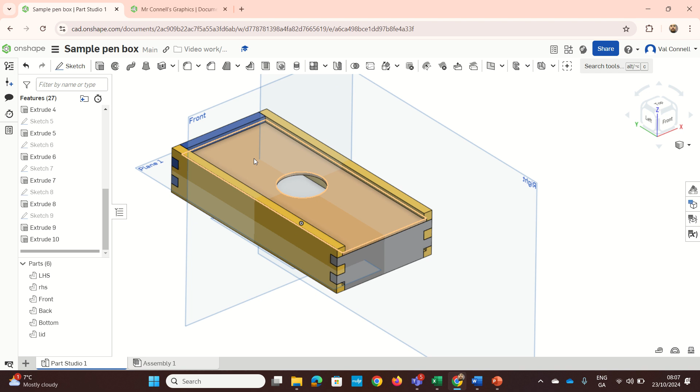So, welcome to this Onshape video where I'm going to teach you how to make a pen box or pencil box, similar to this one here. In this tutorial, we're going to learn commands such as our extrude, our mirror, parts and features. We're also going to use the mirror sketch tool that's here. And we will learn how to add some appearances as well.

So we're going to go to create. And we're going to type in our document name. Now, so here we are. We're going to press sketch. We're going to select the top plane. So left click on top plane.

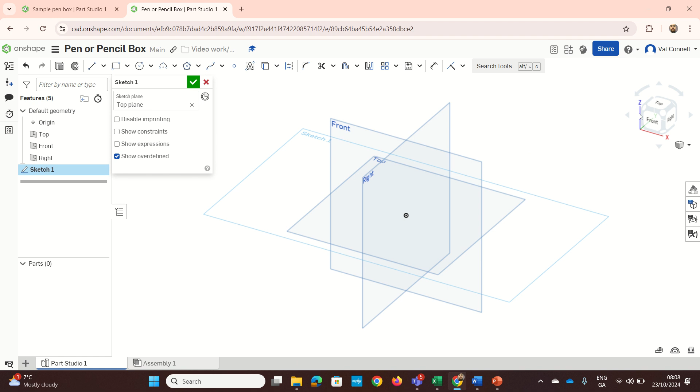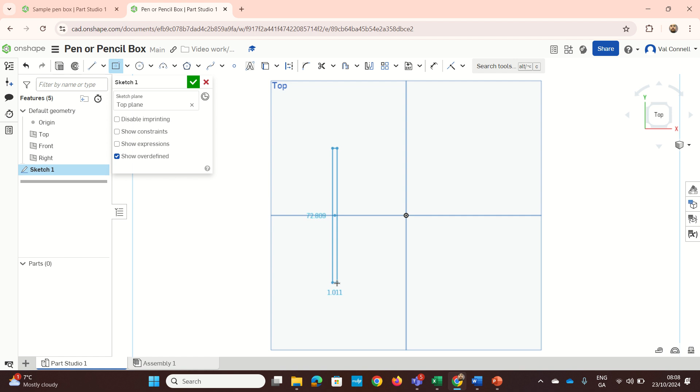We're going to move our mouse to the top on the cube and we're going to click that. And we're going to press R for center rectangle. Now I'm going to highlight the origin. It goes orange. I'm going to move my mouse along the cross, which is an edge view of the front plane, to left click here. I'm going to move my mouse out and down.

So D for dimension. And I'm going to click this long edge here. I'm going to type in 300 mm. And then I'm going to click this one here. And I'm going to type in 12 mm.

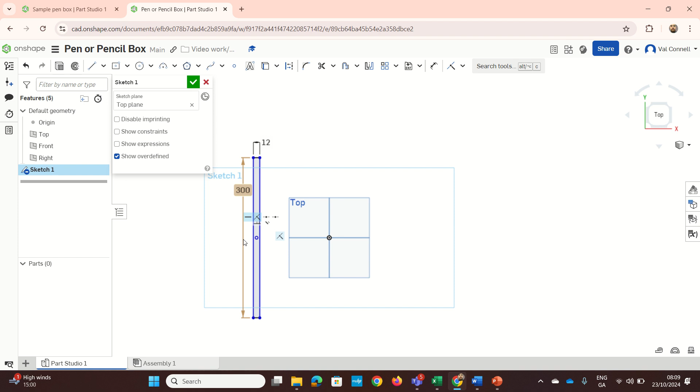Now I'm going to click this point here and click that one edge of the plane there and press I to make sure they're coincident. Then I'm going to go D for dimension, left click this edge here, and left click the edge of the right plane. I'm going to left click the number here. I'm going to type in 50.

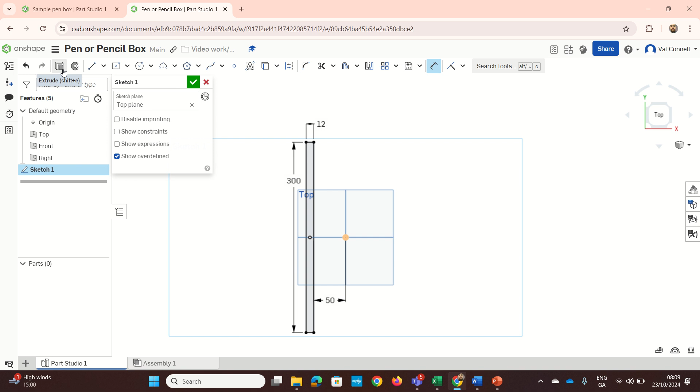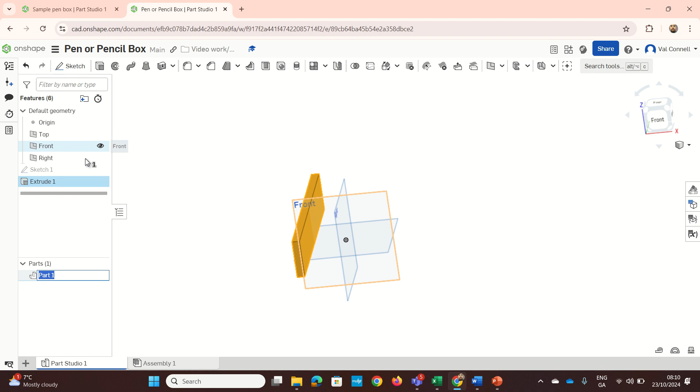Now I'm going to move my mouse up here and I'm going to press extrude. So I'm going to press extrude and I'm going to type in 60 and press enter. And I'm going to go down to parts here. And I'm going to right click over part 1 and rename it LHS, left hand side.

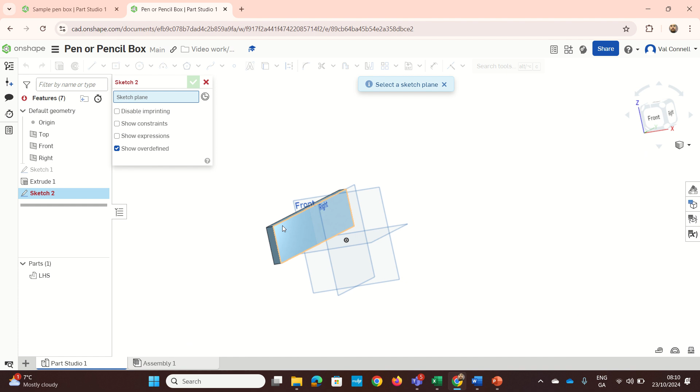Now I'm going to cut out the finger joints on this left hand side. So I'm going to press sketch. I'm going to select the inner face here. I'm going to move my mouse over to right and select the right plane. Now I'm going to go this time and press the drop down arrow here and select corner rectangle, or G for corner rectangle.

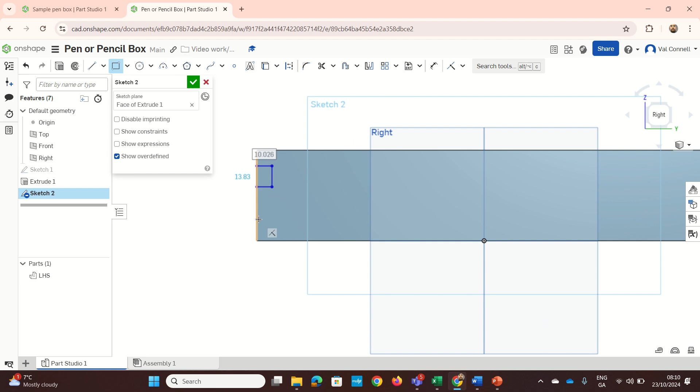Now I'm going to draw one rectangle, and left click here, second rectangle. I'm going to keep them in line. Now I'll turn off the rectangle tool by unticking it or pressing the letter G. I'm going to press D for dimension or select the command there.

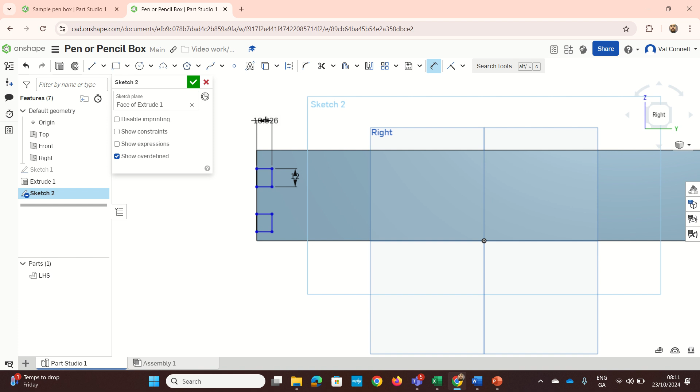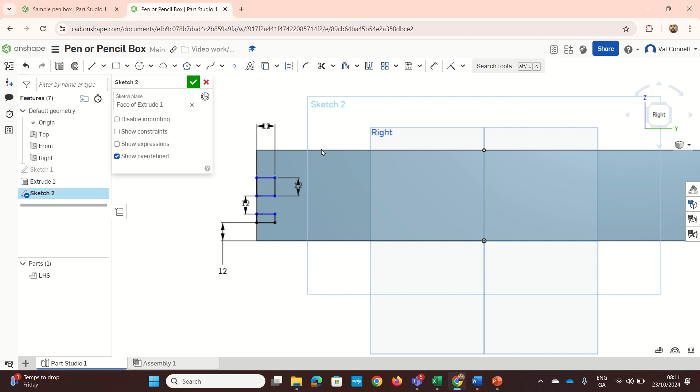Now, I'm going to make this 12. I'm going to left click that as 12. Left click this, then 12. I'm going to left click this line here on the bottom, move it out, take 12. Space here, I'm going to make 12. Now I'm going to turn off D for dimension. So press D to turn off the dimension tool.

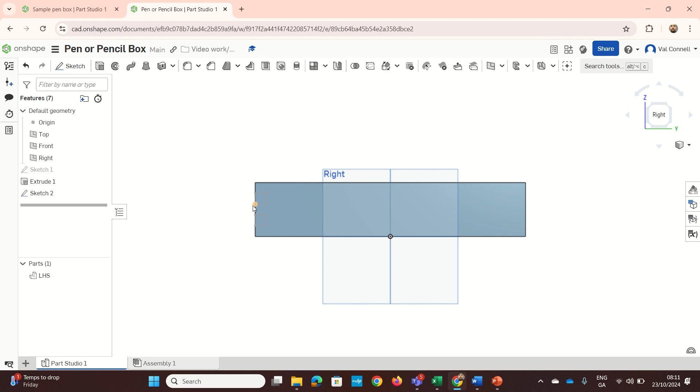I'm going to left click this line and this line and press E for equals. Now we can see there we've got the rectangles in. I'm going to press Shift and the letter E. Then we're going to open up the extrude command. I'm going to move this to remove. I'm going to hit the drop down arrow and change blind to through all. And then I'm going to tick OK.

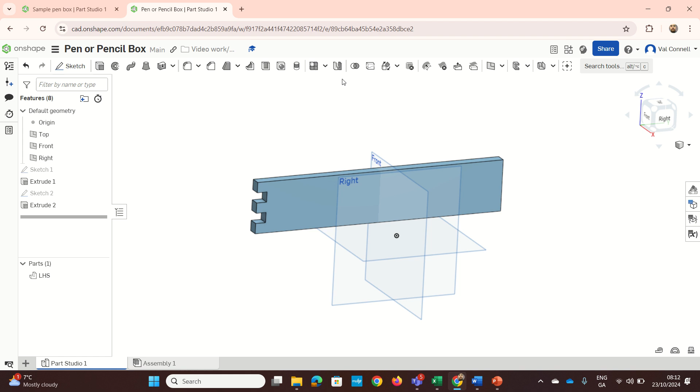So there we have the fingers on one end. Now I want to get them on the opposite end. So I'm going to go to this tool called mirror here. I'm going to left click that. Now I'm changing from part mirror to a feature mirror. Okay. And I'm going to select mirror plane, feature mirror.

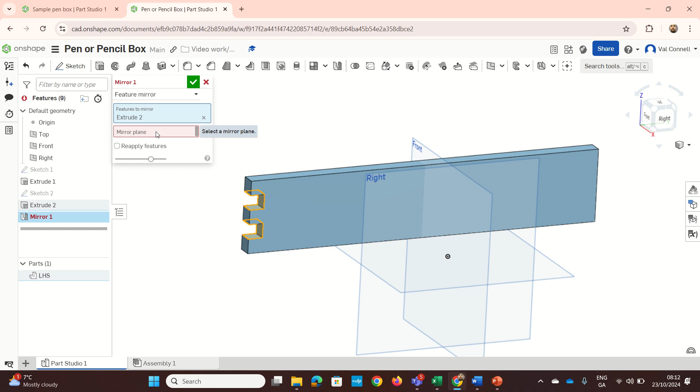So I'm going to left click in there. I'm going to left click the extrude. Now I'm going to left click on mirror plane, select the front plane. And I'm going to tick reapply features. Now, if you didn't put this center rectangle in the middle, on the edge of the front plane here, you're going to have difficulty doing this. Then I'm going to click OK.

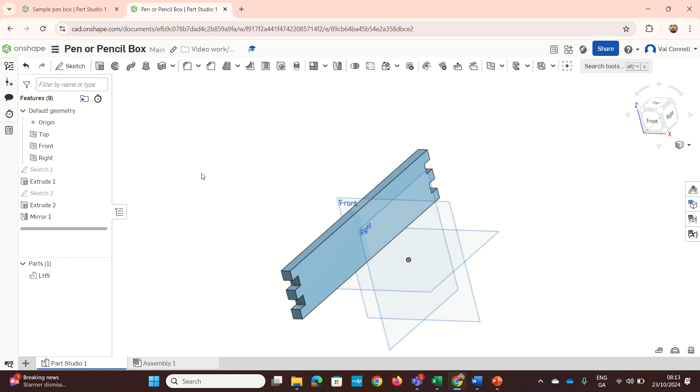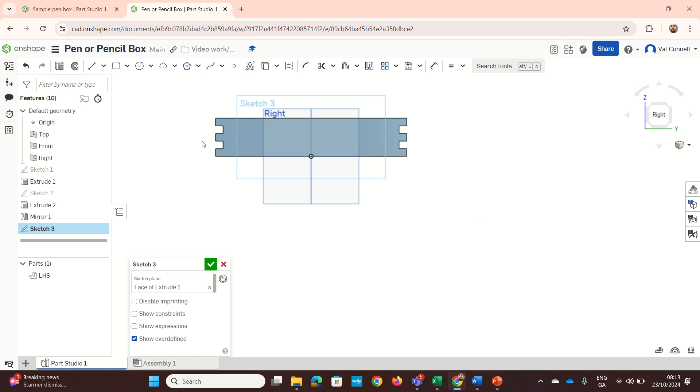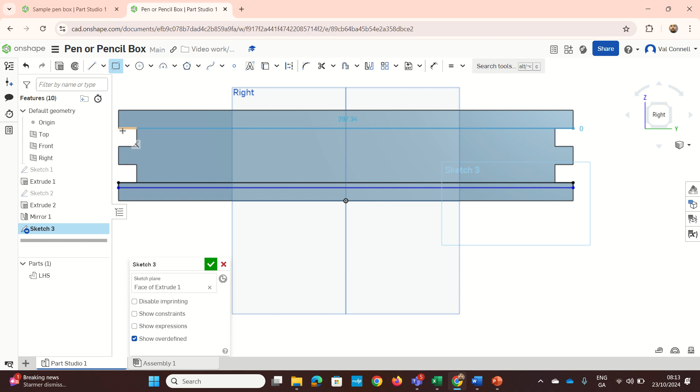Now, we're going to put the groove in for the lid. Now I'm going to select right here. I'm going to go to sketch, select this face here, and I'm going to type in G, corner rectangle. So I'm going to left click this corner here. I'm going to move my mouse all the way over to here, left click there. Then I'm going to go up to the top here, left click here. I'm going to move my mouse all the way over to the left and left click there.

I'm going to press D for dimension. And I'm going to hit the edge, I'm going to type in 4. And then I can turn off D for dimension. So press D to turn off dimension then. And I can left click the bottom line and left click this line here and press E for equals. So that means they're the same size.

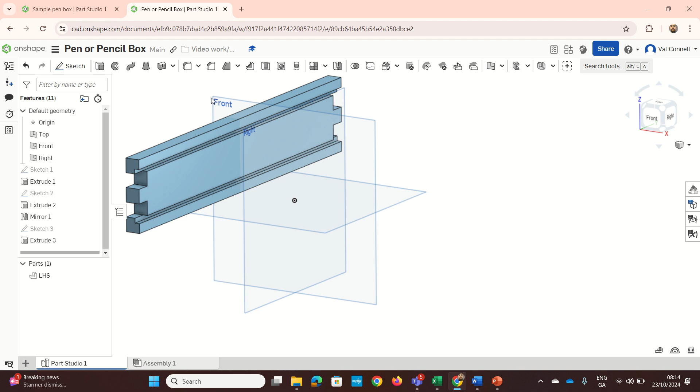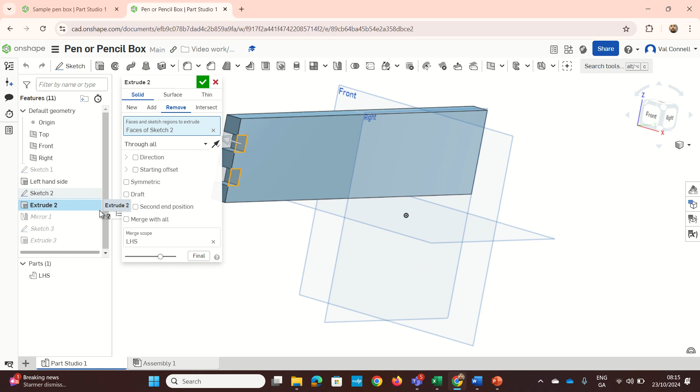I'm going to go Shift and the letter E. I'm going to change this to remove. Keep it blind, and I'm going to change the depth to 4 and press OK. Now we have the groove cut out. Now I'm going to rename this. Alright. Fingers rename. So that was an edit.

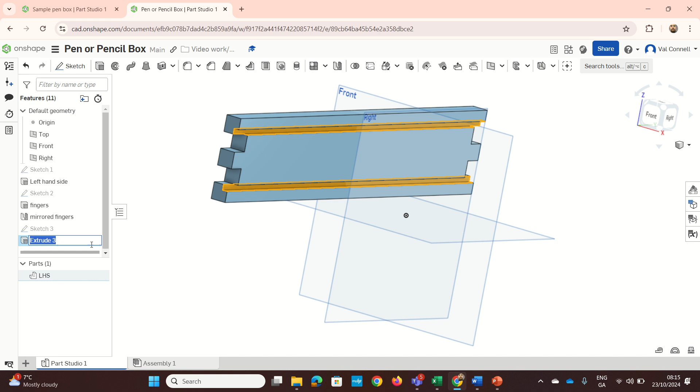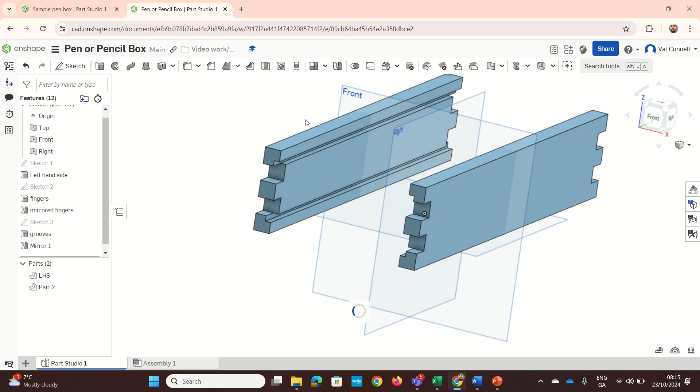Now that's one piece done. So we're now going to get it on the opposite side, on the right hand side. So this is where we're going to learn to do a part mirror. So we're going to go to mirror, part mirror, entities to mirror, this one, mirror plane, right plane, and tick OK. And there we have two pieces there.

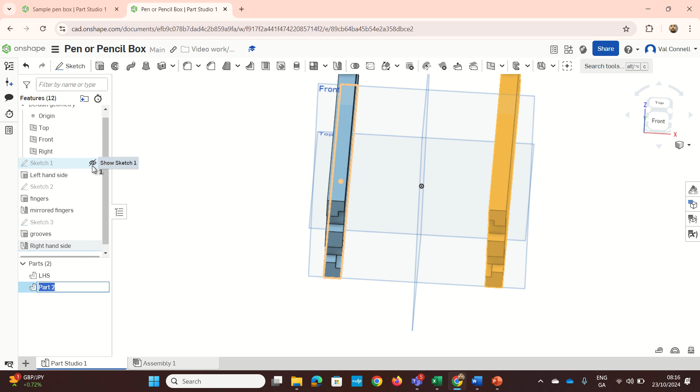Now I can rename, right click on mirror 1, rename. And part 2 I'm going to rename to RHS. Now I'm going to put the back on here. So this back piece I'm going to put on so we can see our finger joints there.

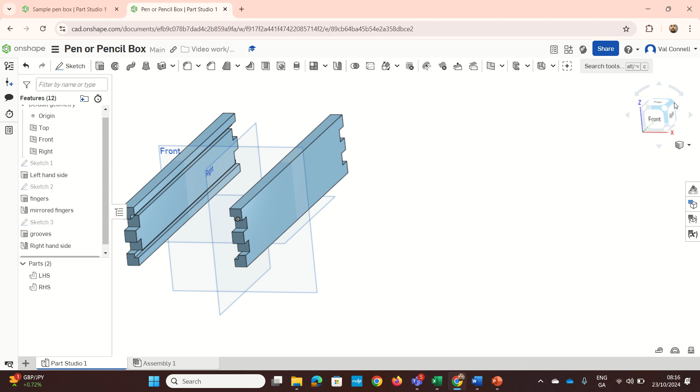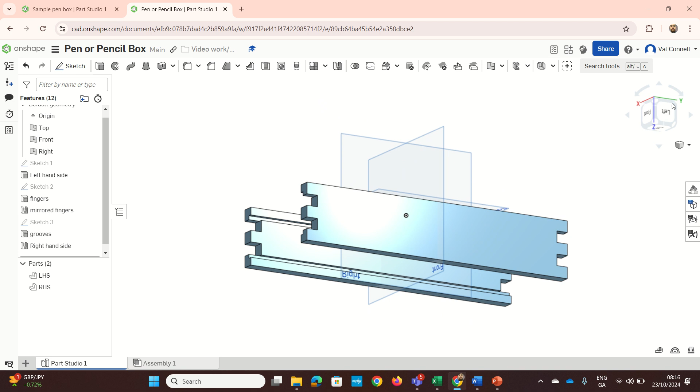Now we're going to move our mouse up to the cube. Okay, I'm going to click the cube there until I get the back selected. Right, so it depends on each student, but you can rotate the cube around like that to be able to find the view that you're looking for if you're struggling on it. There's the back there. Or sorry, that's the bottom, front. There's the back there.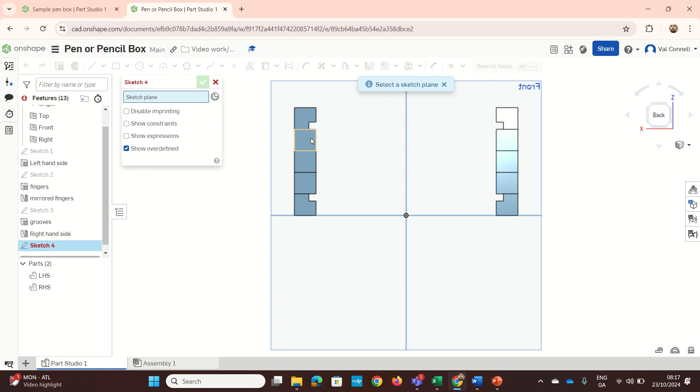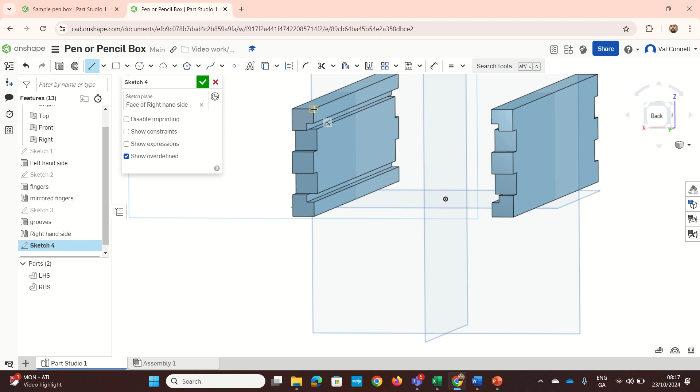Now, I'm going to press sketch. Now, I'm going to select this surface here. So I just rotate a little bit. So this surface here, sorry, this one. I'm going to left click that. Now I'm going to go and hold down the rolly button just a slight bit. L for line, down, okay, across, down, across, down, across, down, across, and down. And then press back there.

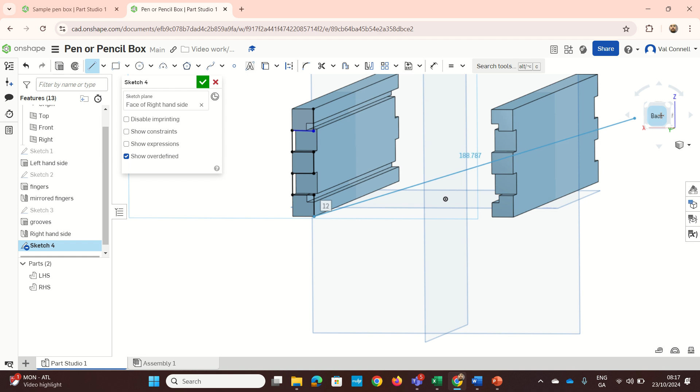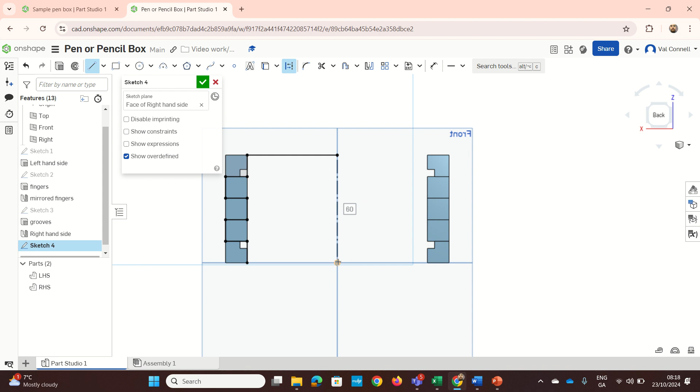Okay, now I'm going to tidy up my sketch. So I'm going to press that line there and press H for horizontal. So we want all the lines to be black. Now I'm going to press L for line again. I want to draw across to here. And I'm going to press Q to turn it into a light line and bring it down to here. And then Q again to turn it back into a heavy line. Now, so we have half of it done there.

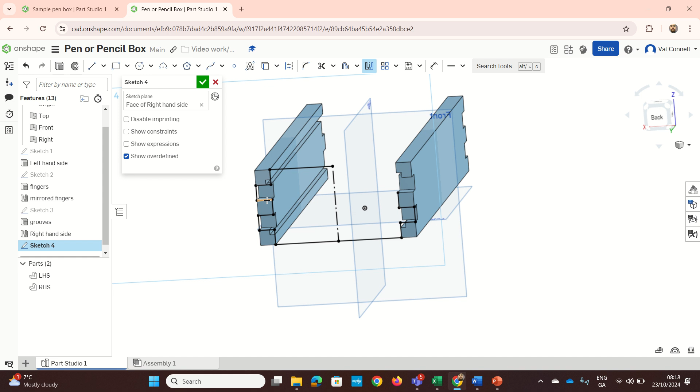I want to go to mirror, select a mirror line. So I'm going to left click the center line. And then I'm going to left click all these ones here. And now it goes grey. Now we're going to press shift and the letter E. I'm going to turn this arrow around. Okay. And I'm just going to drag it back there.

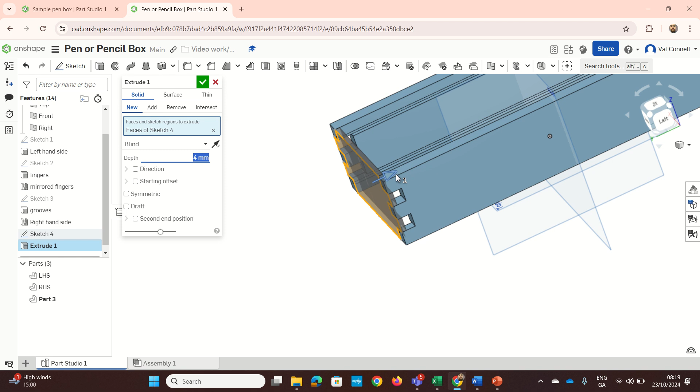And I'm going to press change blind to up to face. And I'm going to select this face here. So just in there, so it finishes at the end of the finger joints. And new has got to be on. I'm going to tick OK. And I'm going to rename this back.

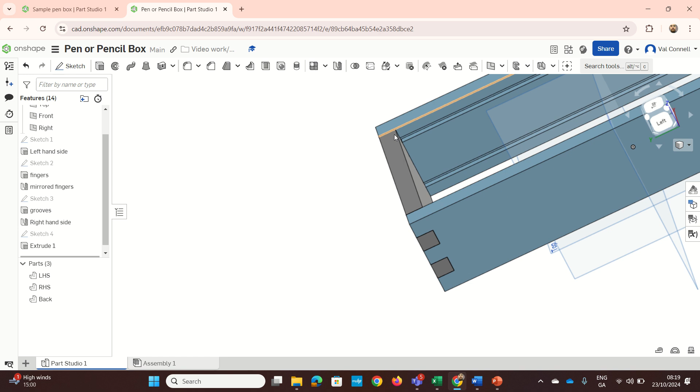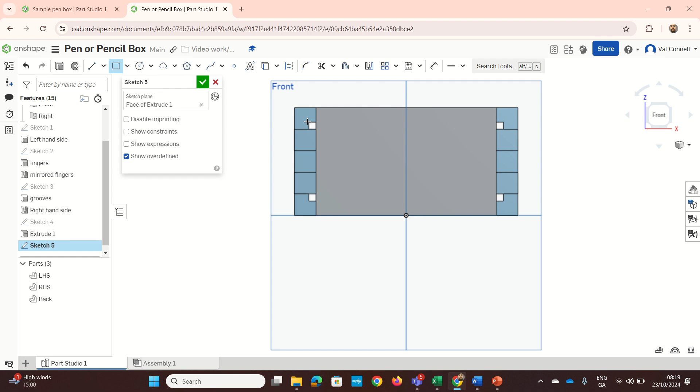Now, I'm going to rotate my model around. I'm going to press sketch and select this face here. And I'm going to hit front. And I'm going to cut out my rectangles. So G for corner rectangle. Left click up here, so just go a little bit over it. And I'm going to move it out here. Now don't snap onto the middle. Okay, so when you see that orange square, don't snap there. Just a little bit further on. So I'll do the same here.

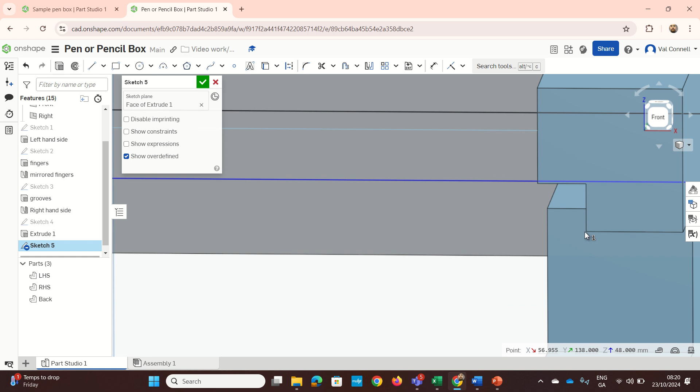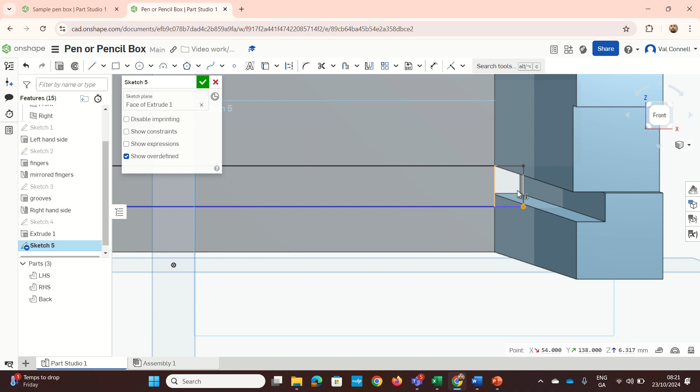Now, press G to turn off the rectangle. Now I'm going to left click this point and left click that one and press the letter I for coincident. To left click that point. Okay, and I'm struggling to get one on the front view. So now when I rotate it a little bit, I can get this one here. So left click that point, press I. I'm going to do the same at the bottom. So I'm going to left click that point there, rotate it a little bit, left click that point and press I.

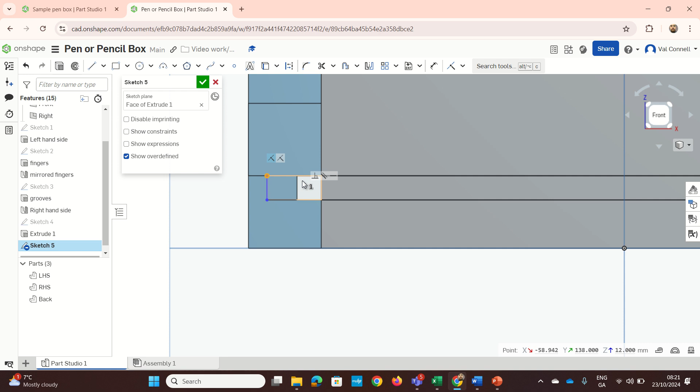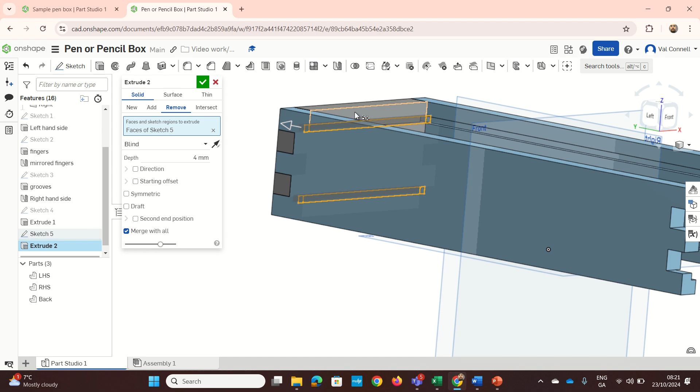Now left click that point. Proving very hard to get, so I'm going to rotate it around a little bit. Left click the point there and press I. Now shift and E. And we're going to go remove. And we're going to type in 4 millimeters. Okay, we're going to select merge scope and select just that part there for a merge scope. Click OK.

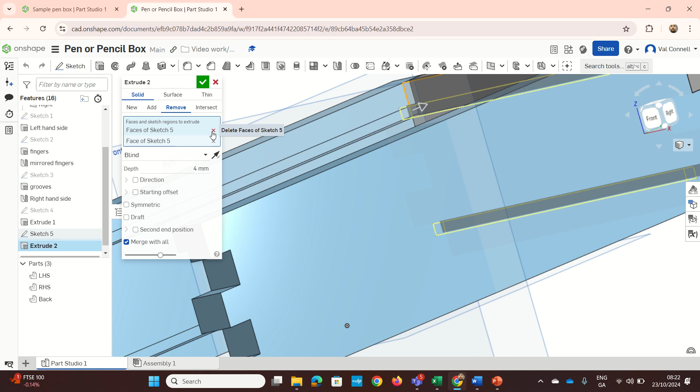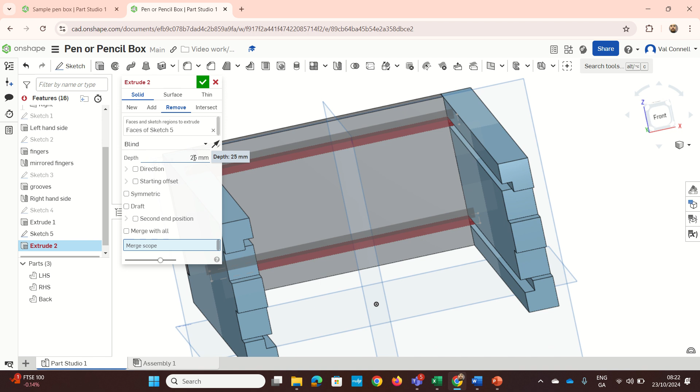Oh, sorry, what's after happening there? I'll have to right click, edit that. Okay. So, oh, I see there, right. So I'll go to clear that. I'll go through it again there, it's handiest. Right click, edit the sketch, extrude, remove, 4. Now merge scope, select the back, tick OK.

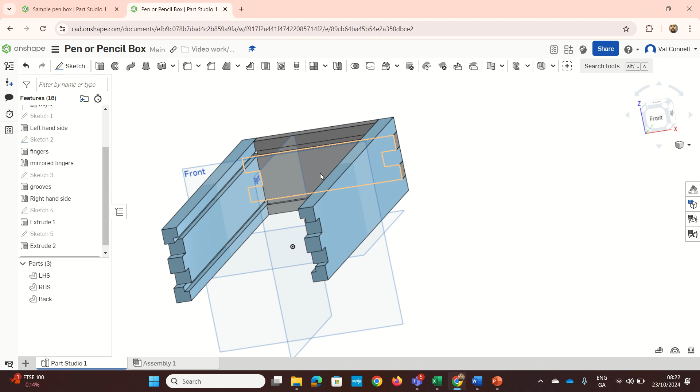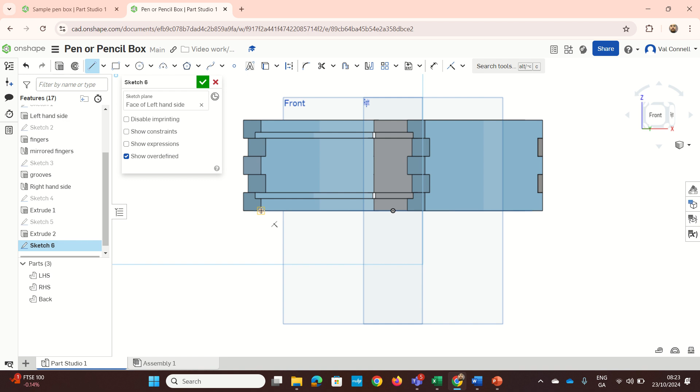Now, there we go. Now I'm going to do the front piece. So I'm going to press sketch, and I'm going to left click that face there. I'm going to press front. I'm going to just press the left arrow key once. L for line. Now I'm going to start here. I'm going to go up, or press the right arrow key. Move my mouse over here to snap so it's horizontal. Across, up, across.

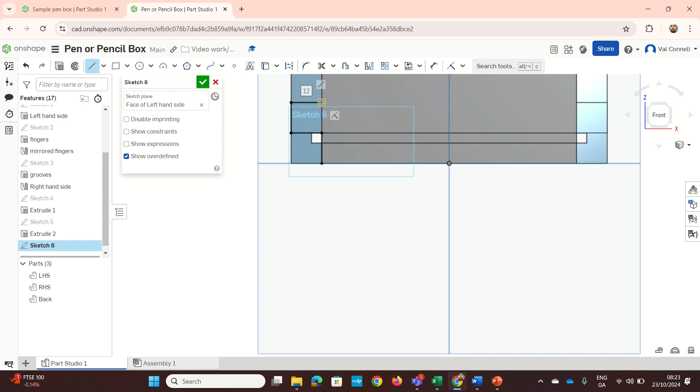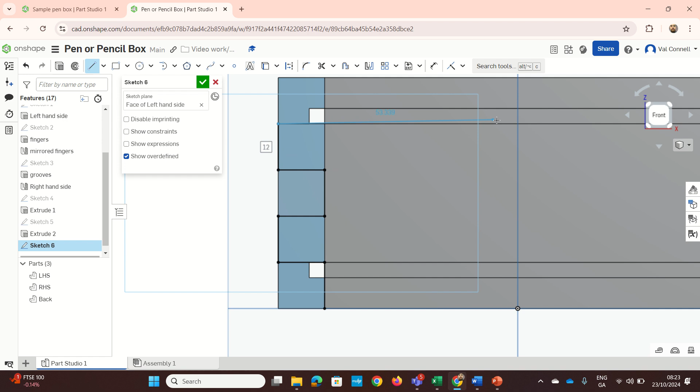So if it goes in arc, press L for line to turn it off, and then press L again to turn it back on. L, up, cross to here. So you can see the shapes we're doing. Now to center, press Q for a light line, back to our front, down to here. Press Q again to turn it to a heavy line. Now we have half of it sketched out there.

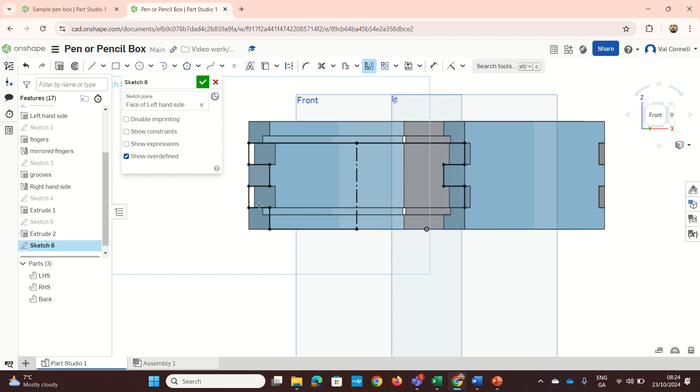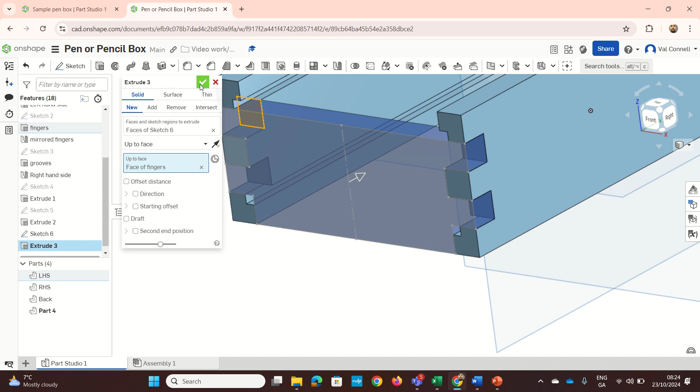Now we're going to press the mirror tool, select a mirror line, this one, and we can left click all these parts that we're flipping around. You see the way it goes grey. I'm going to press Shift, letter E. We're going to change blind to up to face. I'm going to select that face. We're going to click OK. Now, we're going to rename that to front.

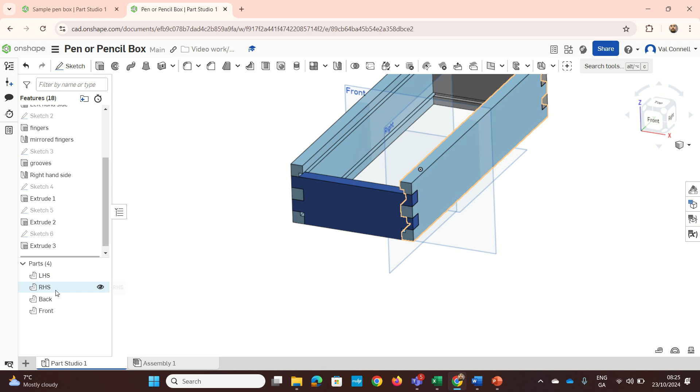And then we're going to cut the groove along the bottom here. So I'm going to go over the back here and press hide the back. Now, okay, I'm going to select the back on the cube here.

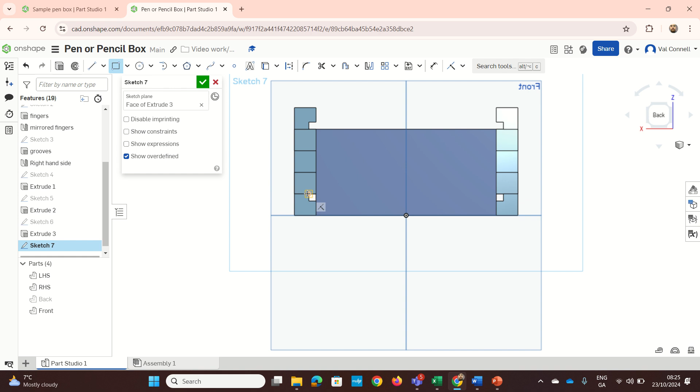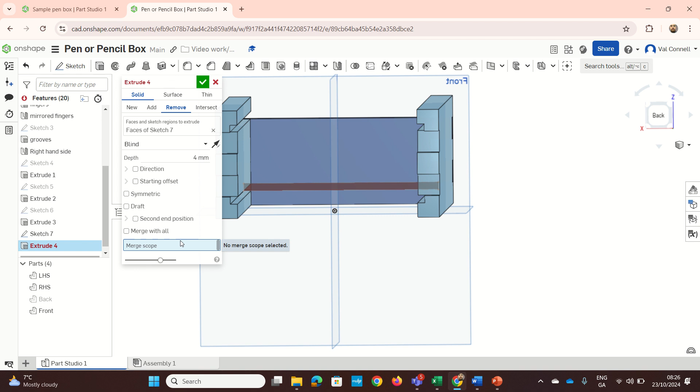I'm going to press sketch, select the face in the front piece, G for corner rectangle, start from the top corner there, move it over here, click it, press G to turn it off, then left click the point, and left click that point there and press the letter I. And then we're going to go Shift and the letter E. We're going to go to remove. We're going to type in 4. And then we're going to left click merge scope and we're going to select the front piece. Click OK.

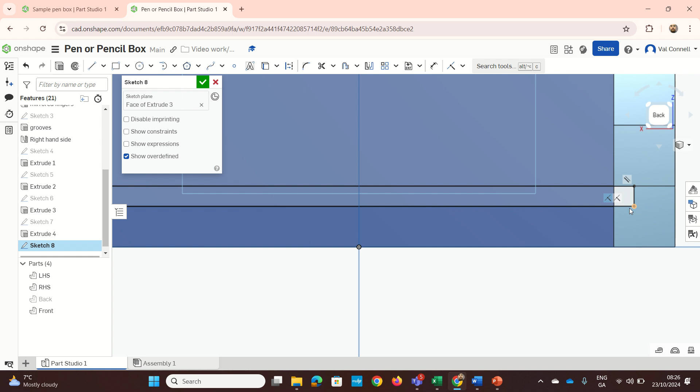Alright, so we're going to put in our base. Now I'm going to press sketch, select the inside of the front face, and press back, so that means you're seeing the reverse. G for corner rectangle. So I'm going to left click at that corner, do my same principle, move it out there, press G to turn it off, left click that point, left click that point, press I, and now we're going to go extrude, and we're going to have new, and we're going to change blind up to face.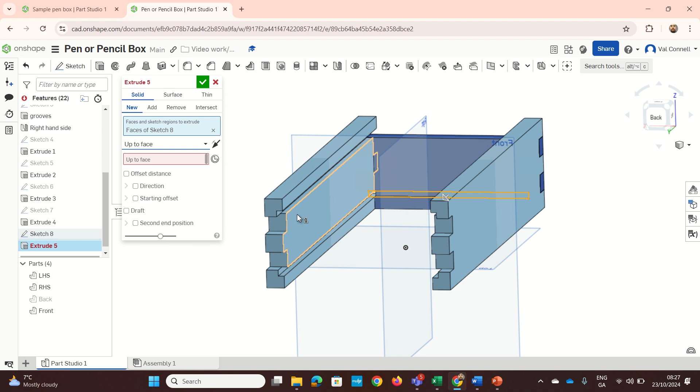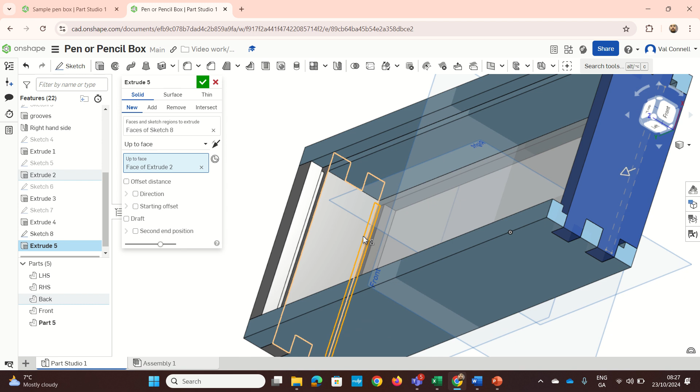Now this is where it'll be tricky. We'll have to go to the back, turn our eye on, we're going to zoom in here. We're going to select that face in there. Okay, I have to left click up to face and tick that there. And then I'm going to tick OK. And I have the base there. So I can rename that the base. And now we have to do the lid.

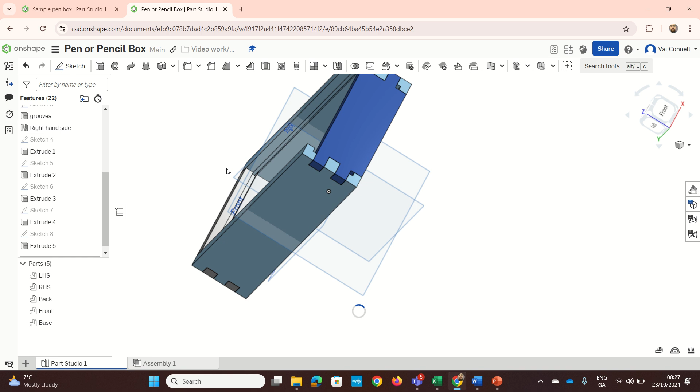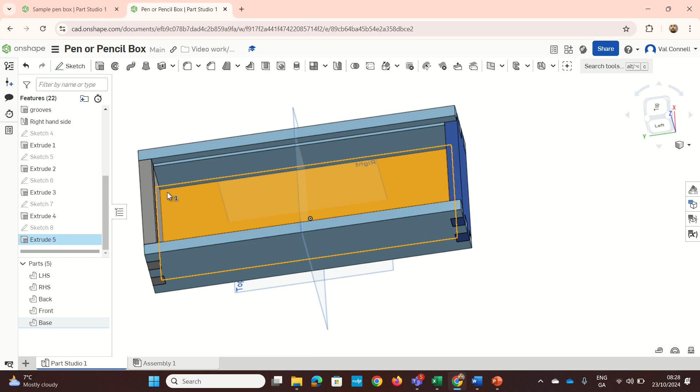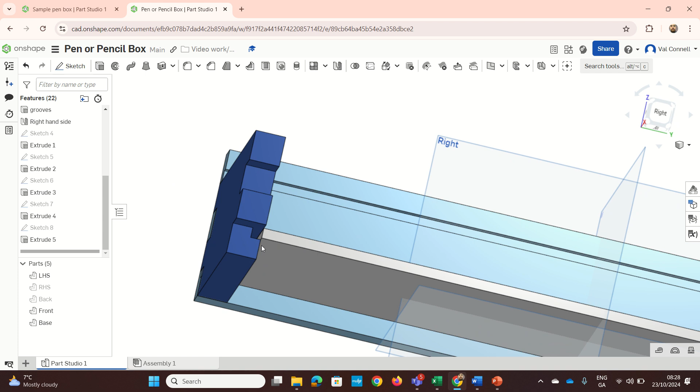Okay, so I'm going to press sketch. Now, just while I think of it, my extrude started. Where did it start from? I'm just going to right click or go over to my back and press hide. And I'm going to go over to my right hand side and press hide. Now zoom in there, and I don't like that there. That doesn't work. So I started on the wrong sketch plane.

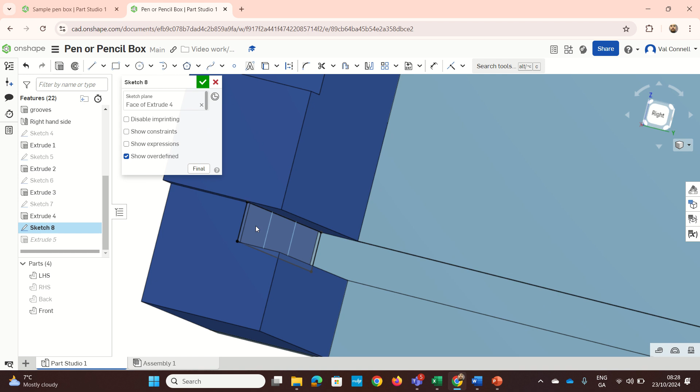So I'm going to right click the sketch 8 and I'm going to press edit. Now I'm going to X out of face 3. I'm going to select that face there and tick OK. Alright, and now that's changed. Now I'm going to turn on my back again. And I can leave my right hand side turned on so I can press show there.

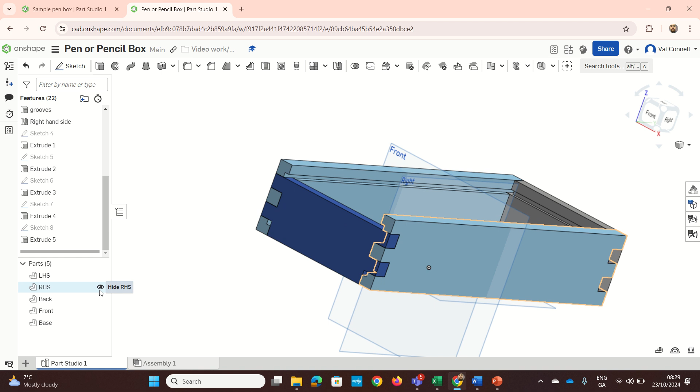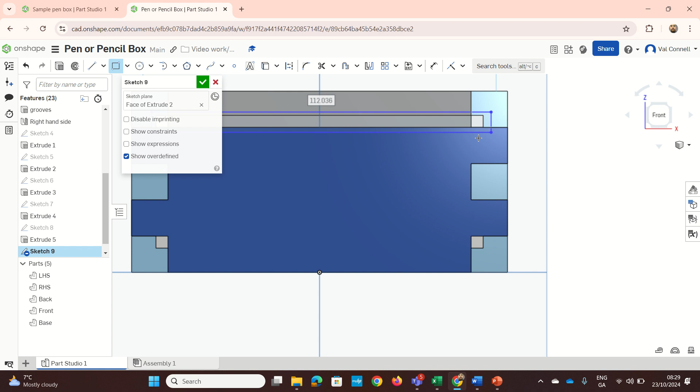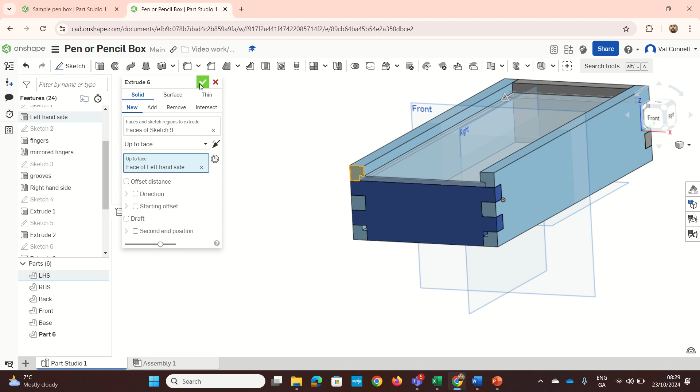Now I'm going to press sketch. I'm going to zoom in here and select this face here. Select the front, G for corner rectangle, left click out there, left click out there. Now left click that point, and that point press I, left click that point, and that point press I. Then Shift and E, and I'm going to change this to up to face and select that one there, and it's new, and we're going to tick OK, and I'm going to rename that to lid.

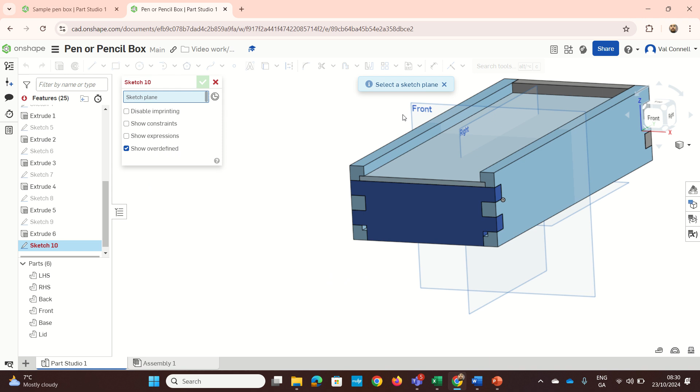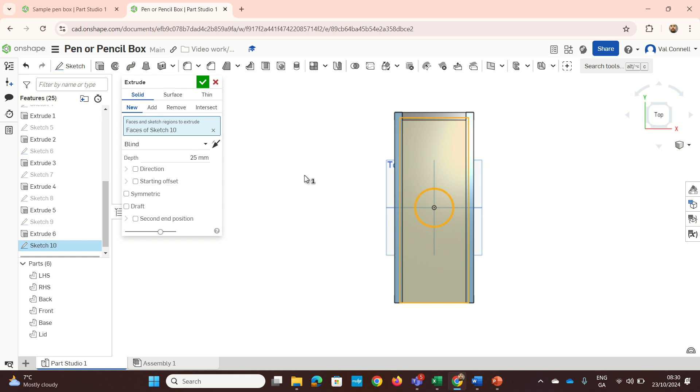Now we'll put a hole in it, so we can be able to pull out our lid. So I'm going to press sketch, sketch plane, the top face. I'm going to press OK, C for circle. I'm going to draw a circle in the origin there, D for dimension. I'll type in diameter 60. Shift, letter E, remove, up to next. So that means it goes up to the next face, and click OK.

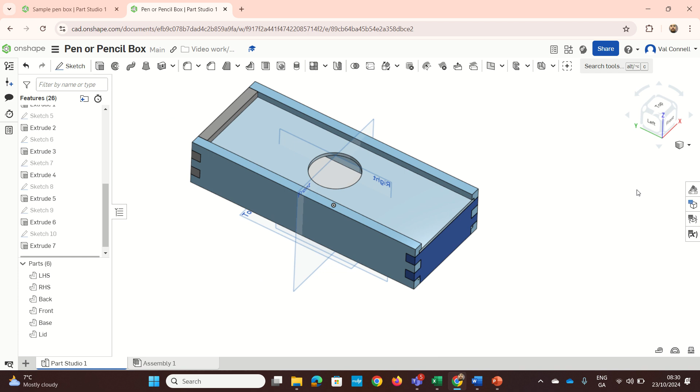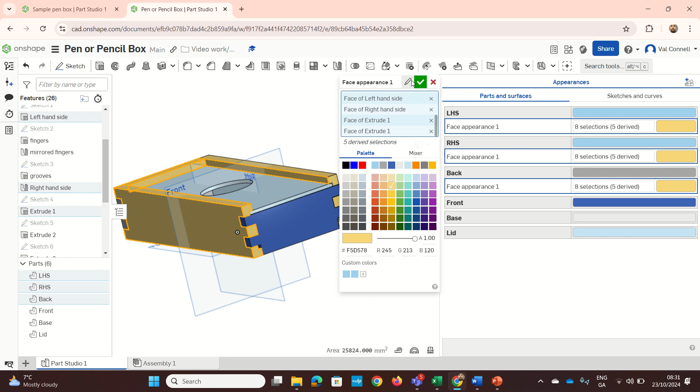Now, if we want to add colors, you can go in here, appearance panel, parts and surfaces, or you can go up to add face appearance and you can click the faces there as you so wish, if you get more fun doing that. And you can tick OK, select it again then if you want different colors. And so on and so forth.